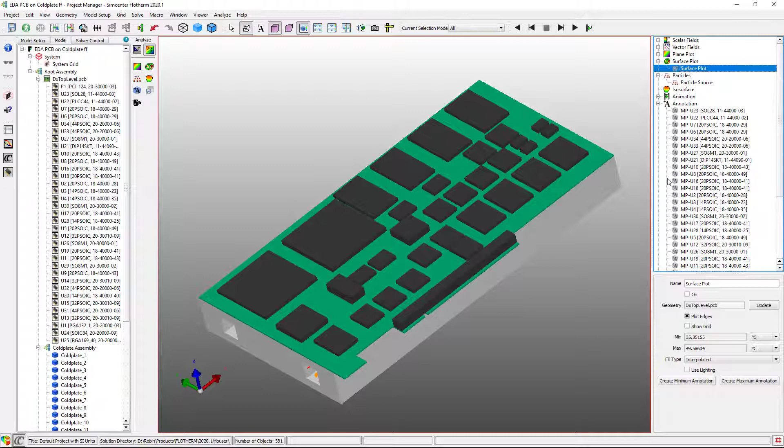Most configurations will need a number of PCBs, so what is the best way to arrange these in the cooling circuit? Doing this in 3D would be far too computationally expensive, so let's take a look at using a reduced order model for this and importing it into a 1D tool.

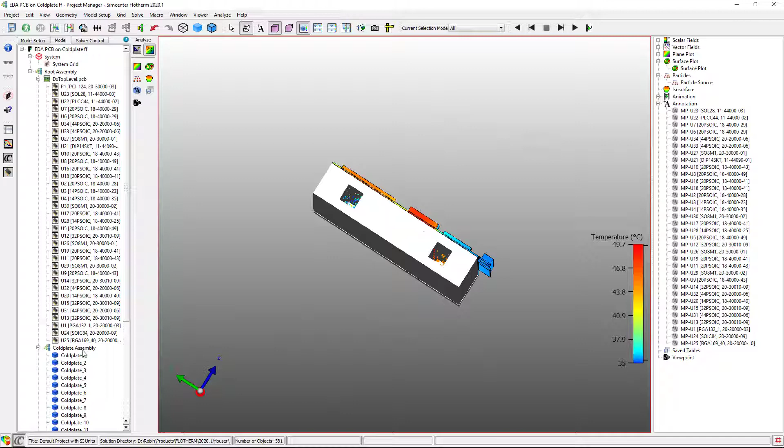The Flotherm model has been solved, and under a low load of 35 watts, the chip temperature gets to 50 degrees Celsius at its highest. Flowing through the cold plate is 35 degree coolant, which works its way through, removing heat away from the PCB.

Using Simcenter Flotherm, these BCI ROMs can be exported and read into Simcenter Flowmaster. The model has been imported as an FMI component and is connected to a thermal bridge which represents the cold plate path. The average temperature and calculated heat transfer coefficient is passed to the ROM, and then a heat flow rate is passed back and input into the thermal bridge.

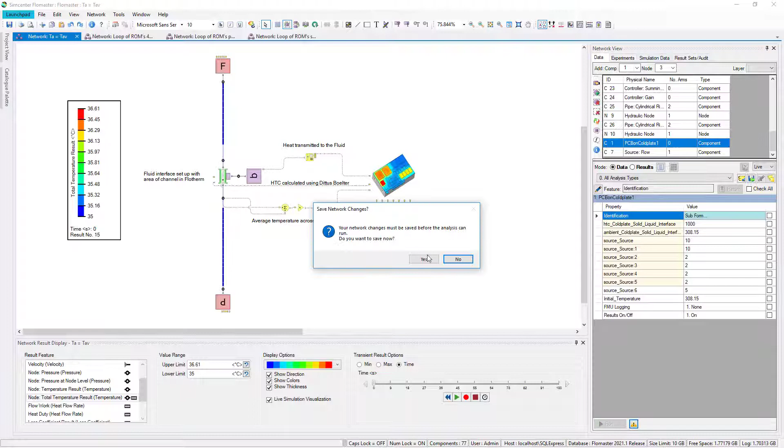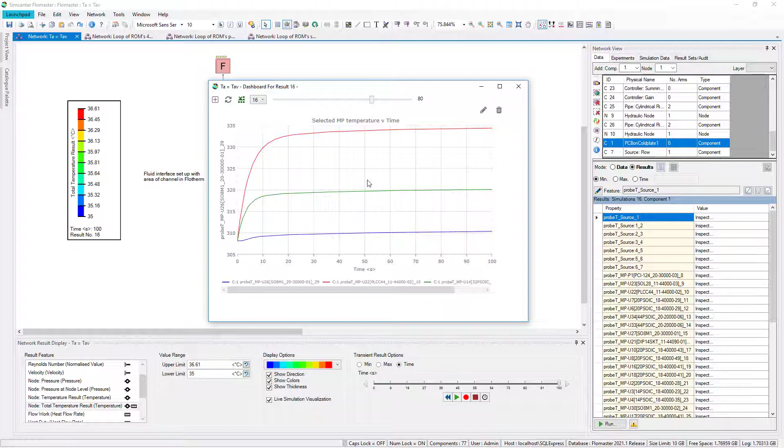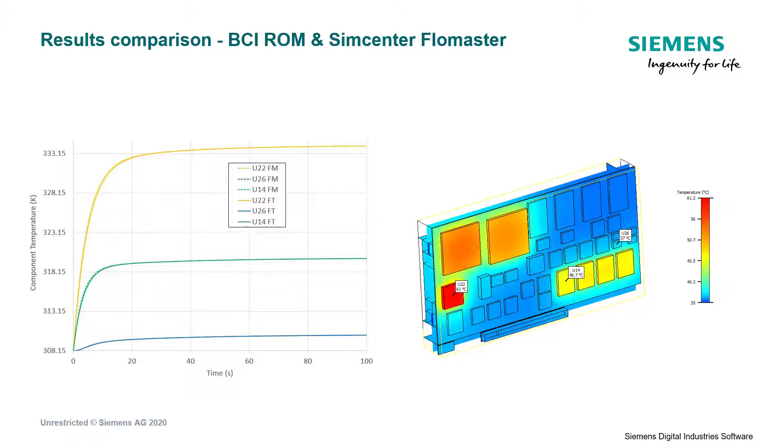All of the electrical powers have been added as input features in Flowmaster. The simulation can be run and the fluid flow visualized much like in 3D. Monitor point data has been exposed as results from the BCI ROM and allows the internal solid temperatures within to be inspected in Flowmaster. Comparing a 100-second heat up scenario, the results give good agreement and show that the imported BCI ROM can give the accuracy of 3D, but with the solution time of 1D.

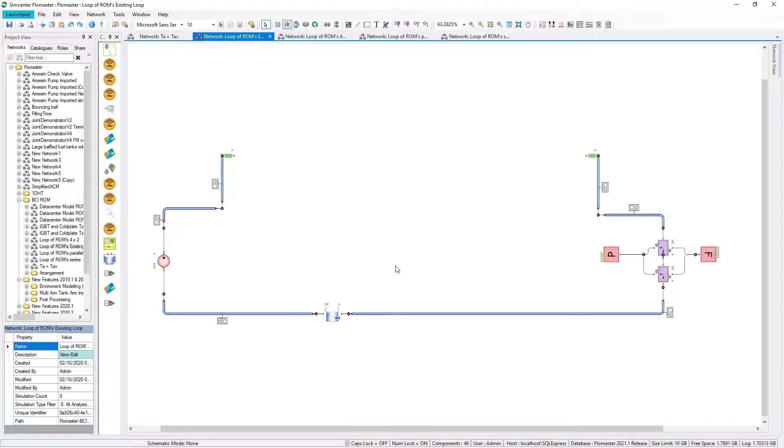Eight cards need to be connected into the cooling loop and will run at a full load of 70 watts. The temperature cannot exceed 80 degrees Celsius in the PCB, and these will be retrofitted into an existing cooling loop, so the design of the loop cannot change. The first arrangement has 2 fluid paths and 4 PCBs in each of these. The flow rate in the 2 lines will be relatively equal, but will the extra pipework reduce the flow rate of the pump?

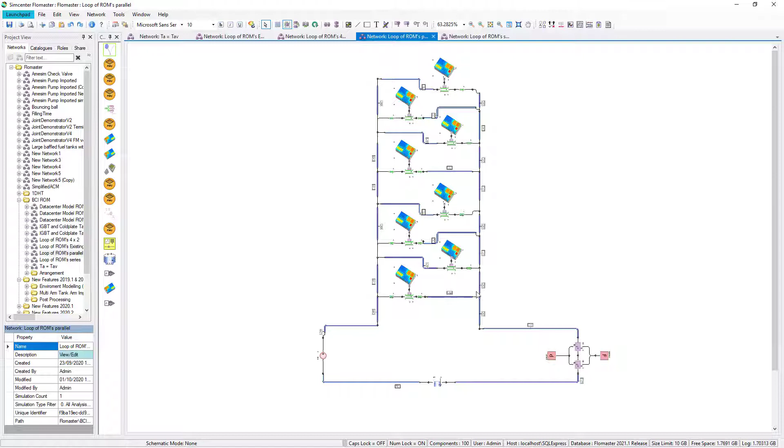In the parallel arrangement, each line will have access to the coolant directly from the pump. In this case, there will be even more pipework of a smaller diameter, and will this reduce the flow rate even more? In series, the PCBs will have access to the highest flow. However, will the compounding of this take the maximum over 80 degrees Celsius?

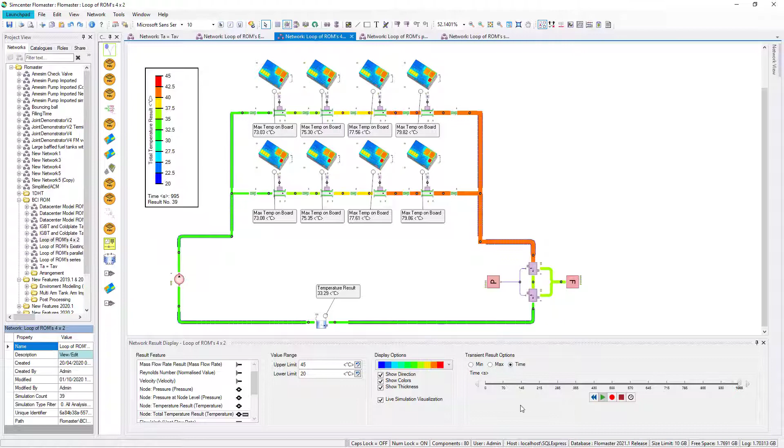In arrangement 1, we can see the solution running and the results visualized as the simulation is run. As the system heats up, we can see the hot fluid moving around the system and the temperature in the reservoir increasing. The maximum temperature the fluid gets to is just under 80 degrees Celsius at 1000 seconds.

When arranged in series, the temperature increases by a small amount across each, but the combined effect leaves the last PCB the hottest, at just over 80 degrees Celsius, rendering the design non-feasible. When arranged in parallel, the temperatures are the lowest, but this will require extra pipework to complete, as each will have to be plumbed into the cooling loop separately.

This design shows that the parallel arrangement gives the coolest temperatures across the 8 PCBs. Running this kind of simulation in 3D would have been computationally expensive, and the pump characteristics would have to have been done by hand in this case to find out the flow rates. Leveraging the 1D toolset makes this much easier and faster to achieve.